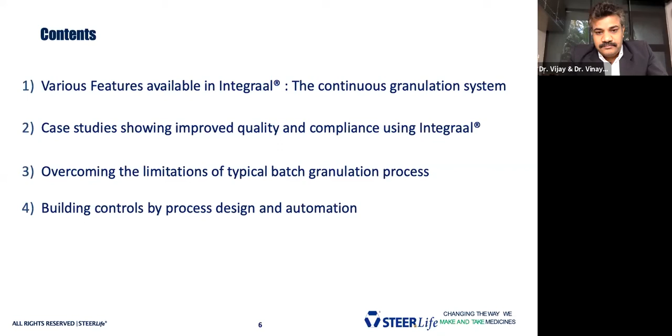Moving forward, let us now understand the current batch process. In the past, we had 2 webinars where Dr. Babu Padmanabhan discussed the introduction of this Integraal technology, and in the second webinar, Mr. Indu Bhushan discussed various critical process parameters, the risks, and how you can overcome them with some case studies. With that background, in a manufacturing process, taking an example of oral solid dosage forms, typically tablets, you start from dispensing and you end up with coating. So each unit operation is connected.

But after each process, you need to collect the material and give the material for quality testing. Only once quality control gives a clearance does it move to the next step. This is one of the major limitations of the batch process. Each process is independent, and the connection is there only if you give a clearance and then it moves to the next step. So finished products are generally tested offline, and when I say tested offline, it goes more by quality by testing.

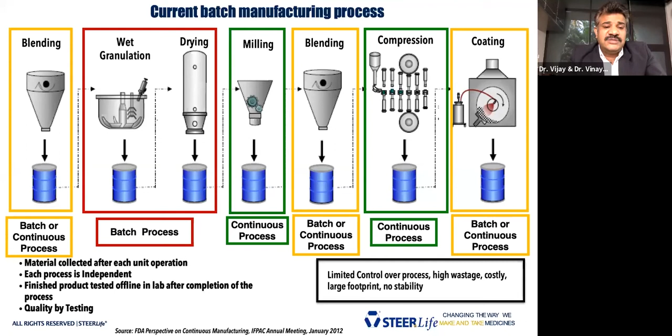Currently, in the batch manufacturing process, milling and compression are already continuous processes, because you keep on feeding the material and the processor keeps on processing the material. Apart from that, blending and coating are now also available as continuous processes. Earlier, they were more of a batch process. But today's point of discussion is going to be on the batch process, which is wet granulation and drying. This currently is a batch process. And today Steer's view is how this batch process can be converted into a continuous process.

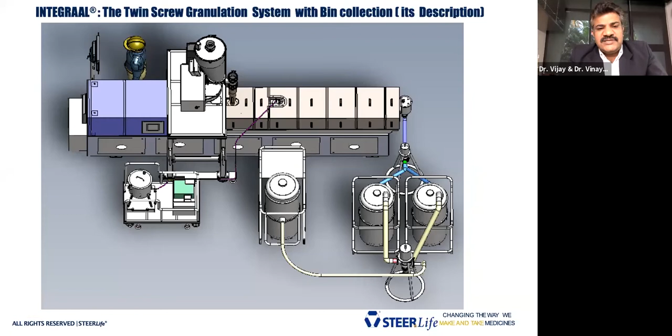So before we understand the process, it is more important for us to understand the hardware, how the equipment is, what the design is, and what the application is of each unit connected to this Integraal. So let's focus on that. As you see, we have two upstreams, which are going to be feeding the material. When I say feeding, it is going to be solid as well as liquid. Liquid feeding is only applicable when it is a wet granulation process. If it is a melt granulation, we may not need a liquid feeding system.

Moving ahead, next is an equipment processing zone, which we call EPZ. This consists of barrels, screws, and shafts. Each barrel is segmented and can be individually kept at different temperatures based on the processing requirements.

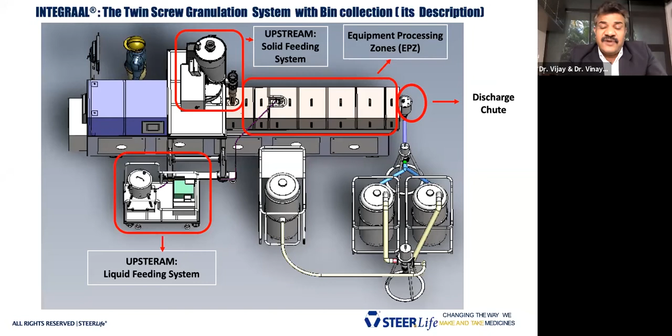At the end, once the granules are initiated, they get discharged through a chute. This is one of the unique designs made by Steer, where it passes the material, and if required, pneumatic air is also conveyed in this system.

Further moving, we have two diverter valves. They have a specific purpose here, and over time we will see in the next slides the role and application of these two diverter valves. Next, we have a collection bin. There are multiple other opportunities, but this collection bin is to collect the granules, which can then be sent to the next section.

Finally, there is a suction unit. This is currently out of the processing area. Its role is to suck the air, or convey the material, from the EPZ to the granule collection bins.

Finally, the HMI, which is human machine interface. This is where you interface between the machine and give the commands for the process to operate.

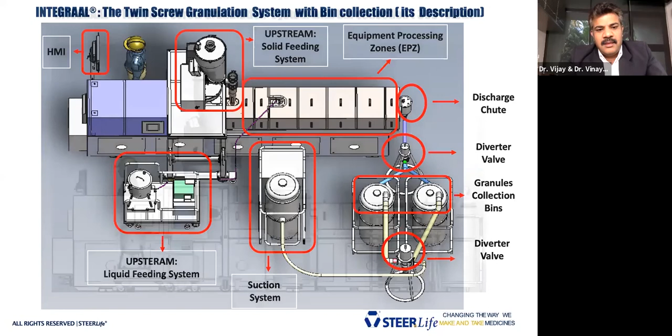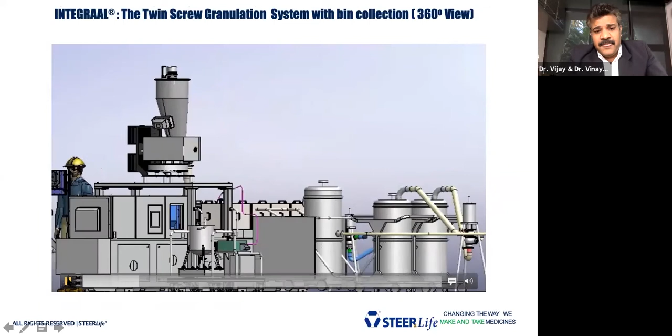After seeing this, let us have a 360-degree view of the processor, how it looks. The Integraal processor consists of various features which we discussed earlier, now represented in an animation where we can see various units connected to each other.

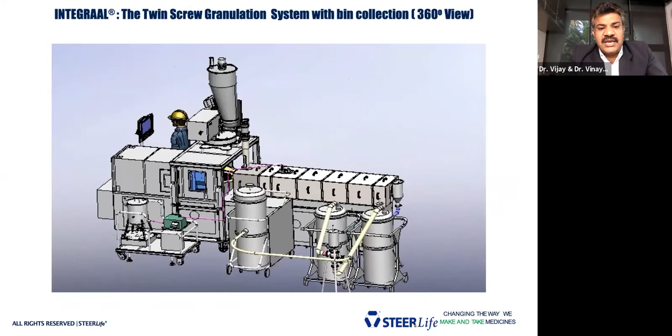After seeing that animation, this is a picture showing our INTEGRAAL Gamma, which is already installed for a commercial purpose. This INTEGRAAL Gamma can produce more than 50 kg per hour, which is a good processing capacity. This system has the capability for drying and sizing in a single step, so a processor can do granulation, drying, and sizing all in one step.

So we are looking forward to how we can have multiple units in the market.

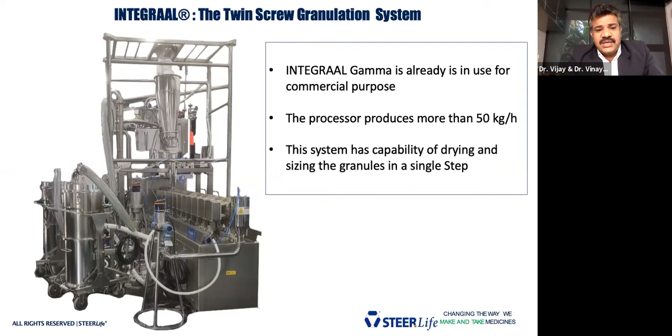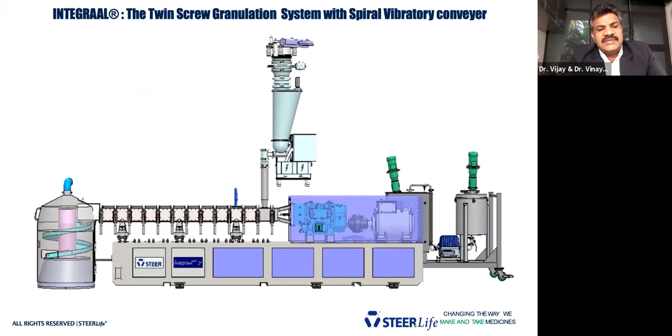Next is an alternative to the downstream. In the downstream, as you have seen earlier, there are two bins. There is an alternative, which is a spiral vibratory conveyor. This conveyor helps the granules get conditioned during the process of being conveyed, and they come out and can be collected in a different bin.

What you can see is a small animation showing how the granules flow inside the vibrating conveyor.

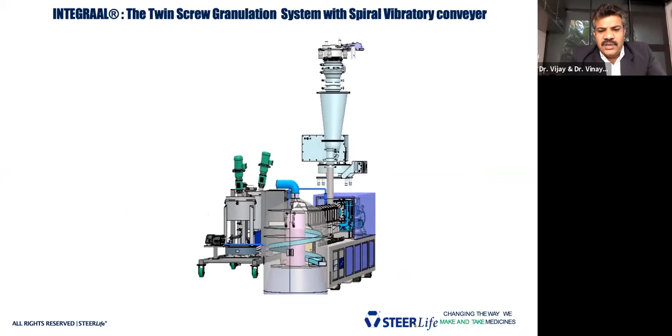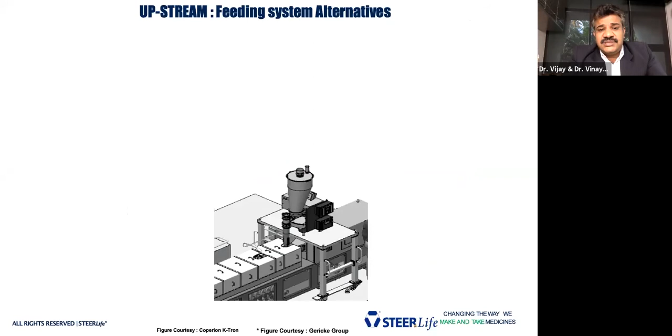After discussing the entire system, let us now focus deep down into the individual components. To start with, let's see the upstream process. Our upstream system is the feeding system, and we would see how the feeders have an effective role in the processing and what different alternatives are available.

There are three different alternatives available: a gravimetric feeder, a volumetric feeder, and a force feeder. Each of these feeders comes with its own advantages and disadvantages. In the next slide, we'll cover the advantages and disadvantages of gravimetric versus volumetric. The force feeder has generally been used for cohesive material.

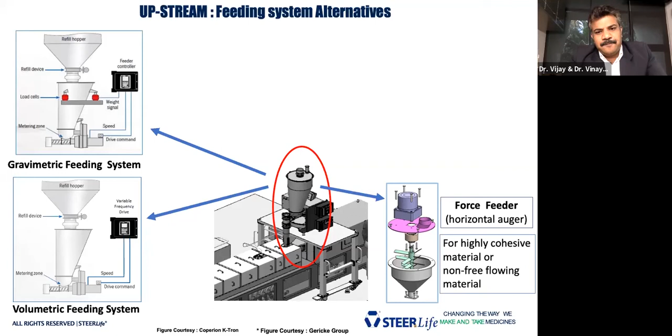But we also have to look a step above this feeder. When I say a step above, you need to feed the material continuously, because since the process is continuous, the material has to be fed continuously. There are two options available: one is supplying pre-mixed granules through a bin, which flows by gravity. Alternatively, you have a continuous blender, which feeds the material to the hopper continuously.

In this, you could see there are multiple feeders based on the intragranular components. It can feed individual material to a continuous blender below, which mixes each component and sends the pre-blended material to the twin screw processor.

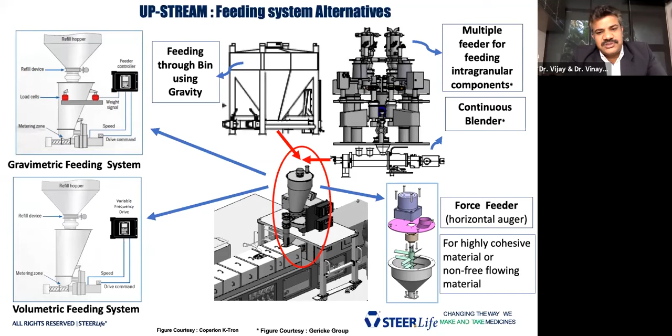Let us now move to the next point where we have a polling question. Over to you, Chetan.

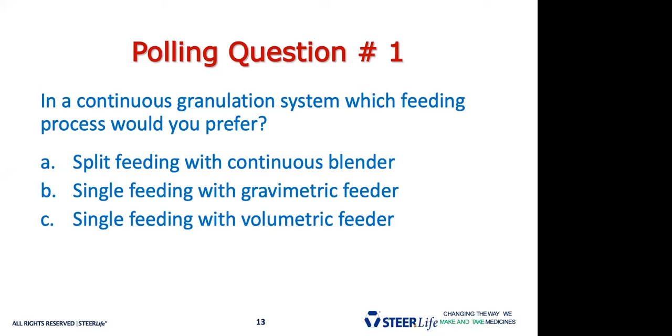So we are sharing the poll results. 52% of respondents feel that split feeding with continuous blender is the preference. 29% feel that single feeding with gravimetric feeder is the preference. And another 19% feel that single feeding with volumetric feeder is the choice.

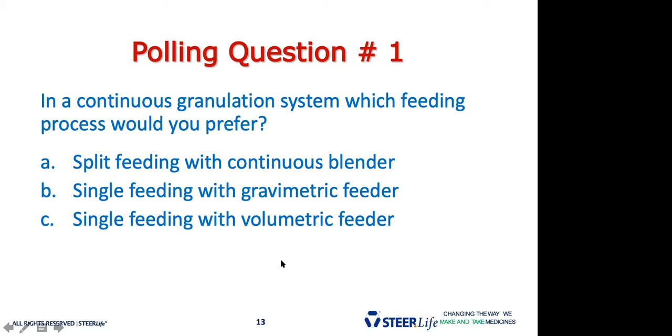Whereas in case of gravimetric, it is controlled in terms of its delivery. There is a controller which provides an input to feed the material at a set rate in terms of kg per hour.

Volumetric is more of an open loop, meaning there is no feedback mechanism. But in case of gravimetric, there is a closed loop system with a feedback mechanism. When I say feedback mechanism, any change of the rate can be fine-tuned again to the desired or set feed rate.

The advantage of a volumetric feeder is that you can use it whenever the critical process parameter of feeding is not very critical. In those cases, the volumetric feeder can be used.

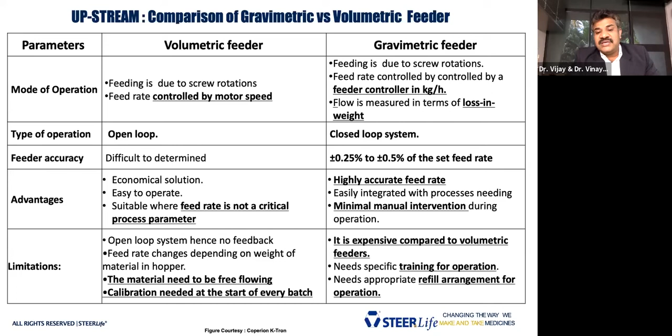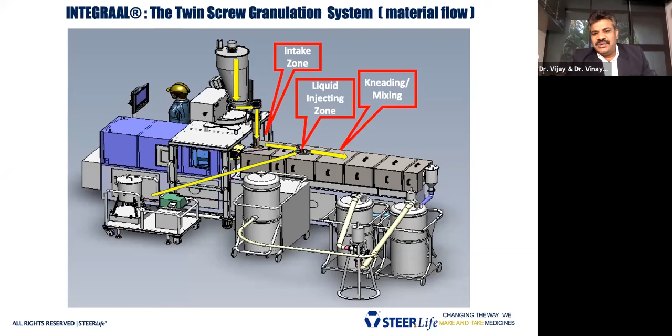It is very important for the solid and liquid to be synchronized, meaning synchronized in terms of their weight—it has to be fed uniformly. At a later stage, once the solid and liquid are mixed together, there is a kneading section, where both get mixed and then move forward.

If the process is meant for dry granulation, you don't need to add any liquid. But if it is a wet granulation process, you need to add liquid. And when you add liquid, the terminal end of the processor needs to be heated. Or if it is a melt granulation process, you can cool it, so that once the material comes out of the processor, it has been either cooled, or any steam or moisture present will be taken up in later stages.

From the discharge chute, it moves to the collection bin. This suction system acts as a driver, sucking up the total granules and collecting them into the bin.

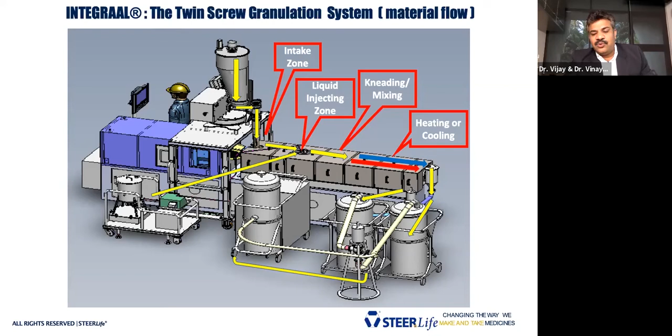So now we have understood about the upstream and the processing section. Let us also discuss the downstream. As we see the processor, I'm going to be discussing the area which is covered now. This is a downstream process.

Now, as I've discussed, heat has been there. Last terminal barrels are heated or cooled based on the application you're looking at, whether it is a wet or a melt granulation. This is how the flow of the pneumatic is going to be, the air or material.

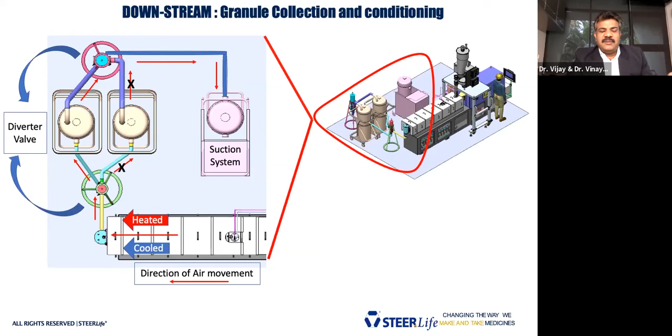So there are two diverter valves, and these diverter valves have unique applications. This diverter valve helps to divert the material or make a single stream. So once one stream is open, the other stream is closed, and that is why you start collecting material in one single bin.

And finally, the containers. So we have two containers. Alternative can be a spiral vibrator conveying system.

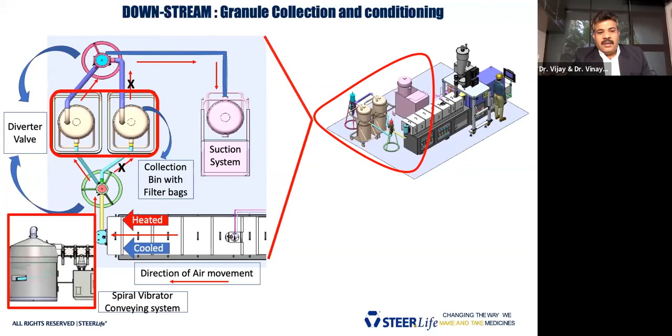If you need to understand the entire process of the downstream, the air displacement is going to be unidirectional, because of the suction system at the terminal end. In a wet granulation process, granules are wet and hot, and the downstream system helps the granules get dried and cooled so that it is available for transfer to the next system.

In case of melt granulation, the granules are going to be hot, and the terminal processing system cools the granules and helps condition them. So there is some advantage of using a multiple bin section.

The reason being, when you start the process, typically like any compression machine, there is going to be some adjustment needed in terms of weight, hardness, but the initials are going to be rejected. In a similar way, at the initial startup, there will be some material which is discarded, and the diverter valve helps discard that initial setup.

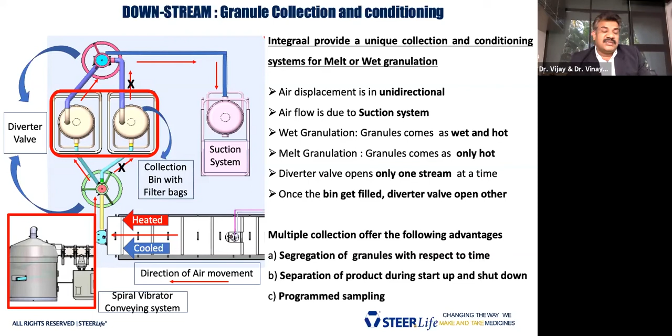And it's also useful at the shutdown process. But very importantly, this helps in segregation of the granules in a timely manner. Because being a continuous process, as we've seen in a tablet compression machine, we collect in a separate drum. In a similar way, the granules from the Integraal are being collected in a separate bin, which helps proper segregation.

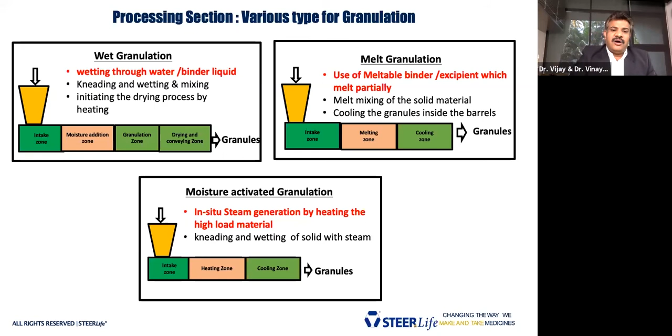So there have been various applications which we have studied. Few of the applications already have some commercial use. Few of them are under progress, so we are working on these various areas.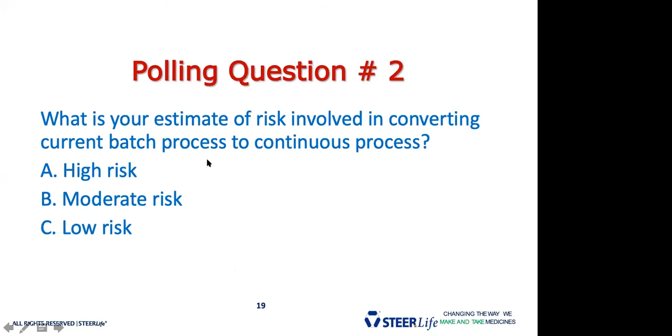I see that majority of you are saying that it's a moderate risk of converting a batch to a continuous process. That's good news. Some of you feel that it's a high risk and some of you feel that it's a low risk. So what I will do is I'll take you through a couple of case studies where we have attempted to convert two high volume formulations from RMG batch granulation process to Integraal continuous granulation process and compare the properties of the granules and the tablets.

So the first case study is on granulation of metformin hydrochloride by wet granulation process. Metformin is a high dose drug and high volume, and it is highly cost sensitive. The RMG process, which is currently followed, has a large footprint and is expensive in terms of power consumption and manpower requirement. The goal of this case study is to produce granules and tablets having comparable quality attributes using Integraal system with no change in Q1 and Q2.

In the Integraal continuous system, the pre-blend of API and the binder is fed. Water is used as the granulating fluid. It is pumped here in this barrel and agglomeration takes place in the granulation zone. Till this point, the barrels are maintained at ambient temperature. In the heating zone, the barrels are set to 100 degrees centigrade to achieve drying and sizing of the granules. Dried and sized granules are collected at the discharge.

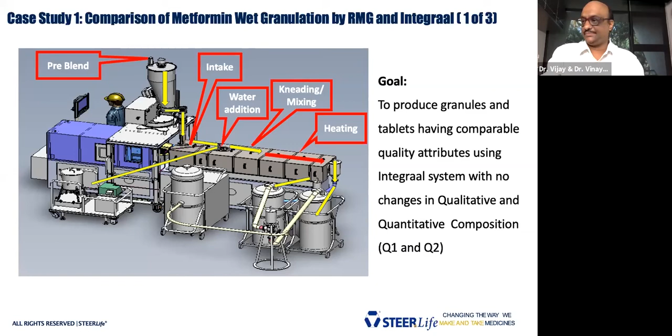The granules were evaluated for their physical properties and found comparable to those achieved by the RMG process. The granules were further lubricated with magnesium stearate and compressed into tablets. The physical properties of the tablets were also comparable to those achieved by the conventional RMG process. The in vitro dissolution profile was tested, and this resulted in a high similarity factor.

For tablets compressed from the Integraal system, significantly less tablet-to-tablet variation was observed in the 10 minutes of the profile testing. This may be attributed to uniform distribution of the binder when a thin stream of material is handled during granulation as compared to when the bulk of the mass is granulated.

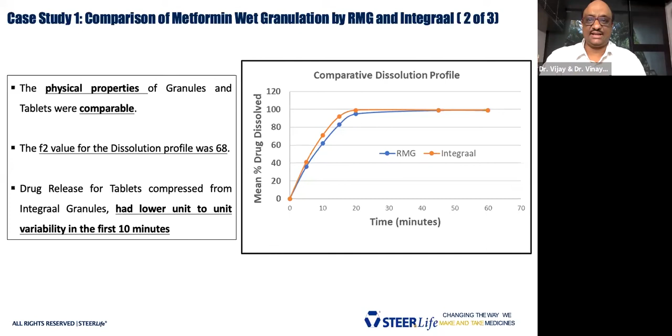The key takeaway from this case study is that we were successful in achieving comparable granule and tablet properties without any change in qualitative and quantitative formula. This indicates that the mechanistic principles of granulation, drying and sizing, which happen in a single step, are similar to those of the batch processing equipment train where multiple equipments are used.

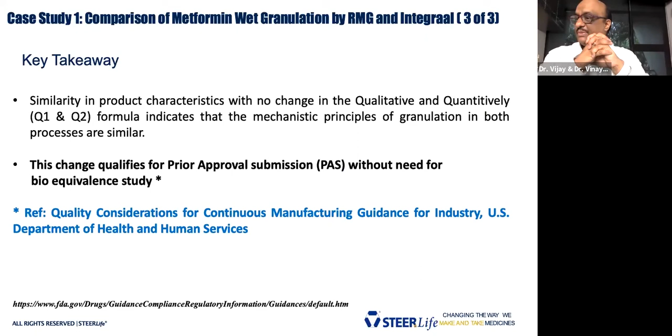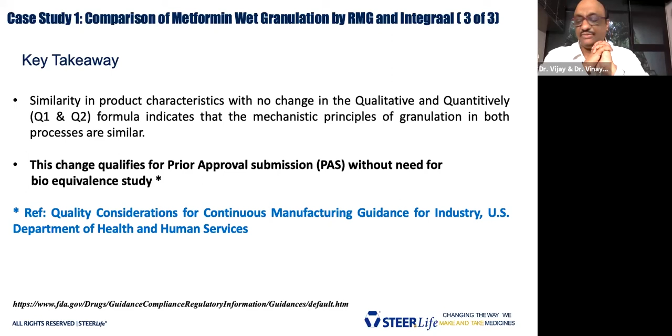As per the draft FDA guidelines on CM or continuous manufacturing, these changes may be qualified for prior approval submission filing strategy with no requirement for additional bioequivalence evaluation. These guidelines were recently released by FDA in 2019.

In the second case study, there are two drugs, API 1, which is high dose, and API 2, which is low dose. Both the APIs have different physicochemical properties. For example, API 1 is practically insoluble in water, while API 2 is low melting. In the current RMG process, only API 1 is granulated, while API 2 is added extragranularly and blended.

The ungranulated API 2 has a risk of sticking during compression. Also, there are chances of non-conformance of the content uniformity for API 2. The goal of this study was to develop a continuous process for combining both APIs together using the Integraal.

The quality attributes of granules and tablets to meet the existing specification. In the Integraal system, the pre-blend of both API as well as other excipients was fed. Liquid surfactant was diluted in a small amount of water and it was pumped into the processor at the rate of 2% weight by weight. Partial melting of API 2 was done by heating in the barrels in the kneading zone, which provided the agglomeration. Then the granules were cooled and sized in the cooling zone before discharge.

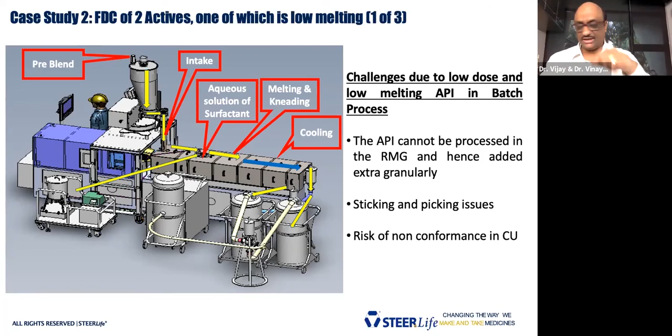The physicochemical properties of granules and tablets were conforming to the specification. Since melt granulation process was used, impurity profile testing was carried out for both the drugs and it was found within acceptable limits. Dissolution test values were complying to the specifications. The dissolution profiles indicate that for the practically insoluble API 1, the uniformity of liquid surfactant distribution is efficient. Also, during the process, there is no interaction between the two drugs since the dissolution profiles are distinctly different and no generation of impurities is observed.

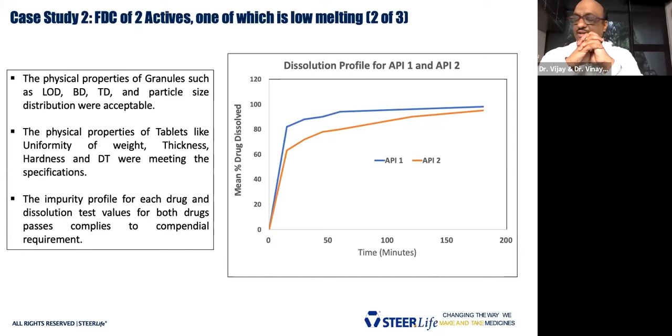The key takeaway from this case study is that granulation could be achieved without any Q1 and Q2 change. The granules and tablet properties meet all specifications. Since the API 2 is now added during the granulation process, the risk of non-conformance for content uniformity is reduced. This change also qualifies for prior approval submission without additional bioequivalence study as a filing strategy.

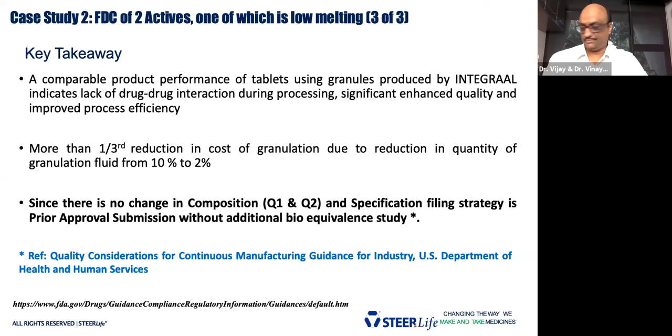Now, I shall briefly describe to you the key quality differences between a batch and a continuous process. The topic is vast. In the presentation, we are only dwelling on the differences at a broad level just to provoke your thoughts and interest in continuous processing system. Before we go there, we have one more polling question, number 3 for you.

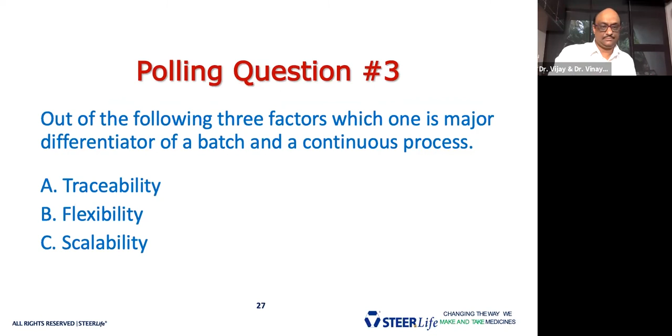Chetan? Yes. So let's see what we have on the third polling question. Out of the following 3 factors, which one is the major differentiator between a batch process and a continuous process? Is it traceability? Is it flexibility? Or is it scalability? We have another 30 seconds to answer this question.

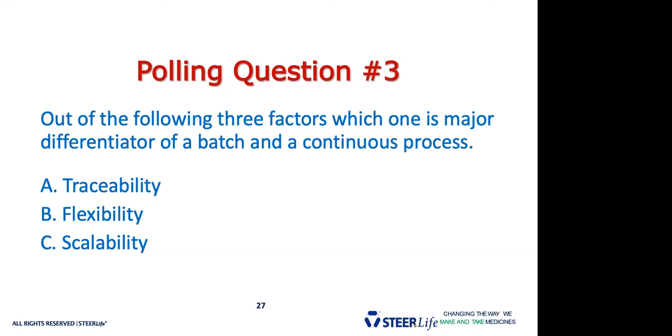So a majority of you feel that the major differentiator is scalability, followed by traceability and flexibility. Back to Dr. Vijay and Dr. Vinay to complete the final part of the webinar. Thank you so much, Prince. It was great to know that scalability you feel is a differentiator. So let us see what are the key takeaways from the quality concepts on each of these.

So these key concepts, the first key concept is on process dynamic. In the batch process, since it relies on endpoint determination in each step, performance of each step in the process is independent of the prior step or the next step. Hence, it is static. Process depends on limited process variables and product properties.

For Integraal continuous process system, it works at a steady state. A set of CPPs and CQAs are kept close to the target value. Transient disturbances in the process parameters are measured and are controllable within the design space. Hence, we call that continuous process is defined as a dynamic steady state.

Batch size. Coming to batch size, all of us know that in a batch process, batch size is typically equal to multiple lots blended in one batch. While in case of continuous process, it offers great flexibility in terms of batch size because it can be based on runtime, it can be based on total material produced, it can be based on total material processed, or even any major production event like a change in the control of the API.

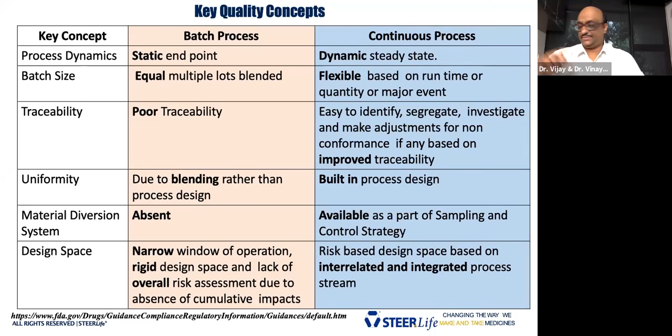Now, next key concept we'll discuss is on scale-up consideration. For a batch process, there are only two options. Either we scale out, take multiple lots on the same equipment train, or scale up is non-linear, where we simply change the size of the equipment. In case of Integraal continuous granulation system, it provides great flexibility with respect to scale up. It can be linear based on either time, mass flow, or both time as well as mass flow.

Another option available for scale up is scale out. Multiple streams of the same size processing equipment will produce materials which are equivalent from different machines, and this will help in just doubling or tripling the output based on how many lines you set up. Or of course it is scale up, where you go for a higher scale of equipment, a bigger dimension of equipment, but this scale up approach calls for another full scale process validation and is considered as a major change.

Next is process validation. Process validation for a typical batch process is carried out individually for each piece of equipment in the train. It is prospective, segmented, and rigid boundary of tolerance. However, in case of Integraal continuous granulation system, process validation starts right from process design stage. Equipment qualification and process design go hand in hand. Once the system is installed at the production site, the design space generated during process development is continuously verified and impact of runtime is evaluated. Also, process robustness is established for all known sources of variability.

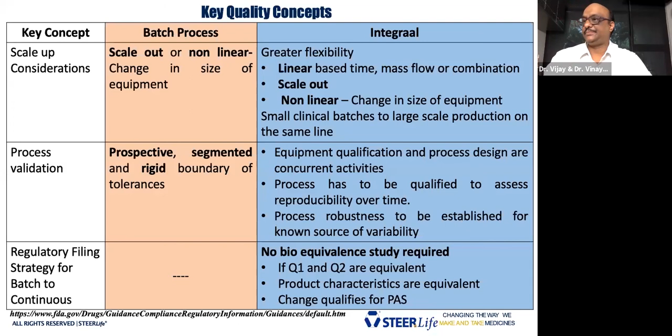Finally, I end with a summary of the key quality concepts which we have been talking about. The current batch system is quality by testing, as Dr. Vijay has already discussed. An Integraal continuous manufacturing system allows for a complete understanding of the process and its impact on the product. Since the operation is integrated and runs at steady state, it allows for mechanistic modeling and drawing meaningful and dynamic design space. Hence, moving from batch to continuous, we graduate from quality by testing to quality by design.

The Integraal system offers enormous potential for integrating with other downstream processes like blending, compression, coating, and packing. This will enable continuous and smart manufacturing. The fully integrated manufacturing system will be self-evolving, will be able to predict risk and have ability to mitigate the risk, and the process will be robust and dynamic in nature.